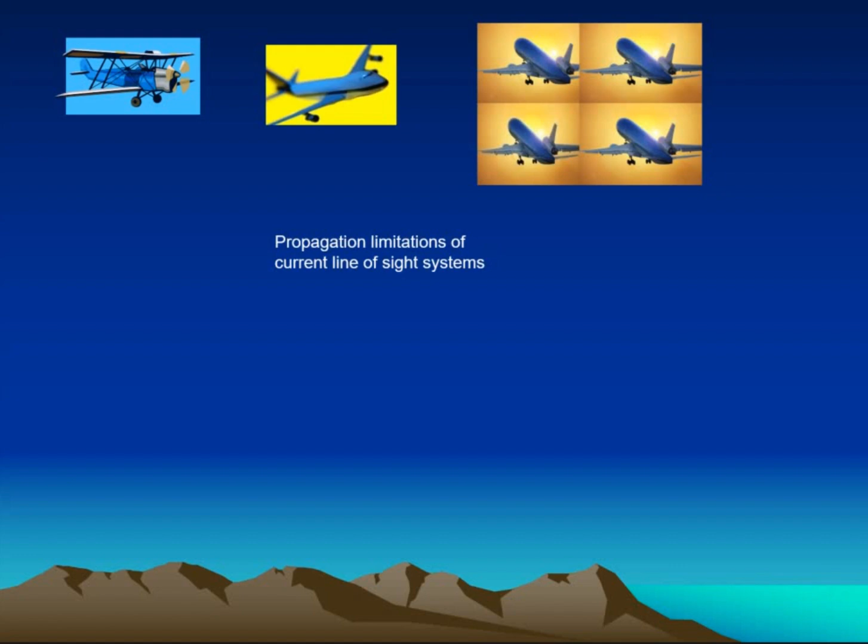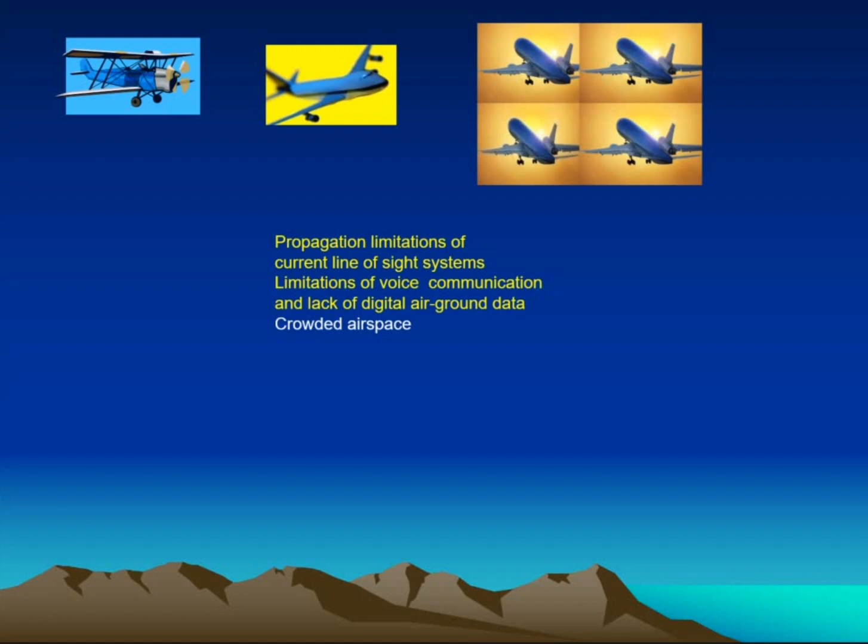But as the industry grew exponentially, so did the challenges, which included propagation limitations of the line-of-sight systems, limitations of voice communication, and a lack of digital air-ground data, a crowded airspace, increased terrorism, runway and ramp capacity.

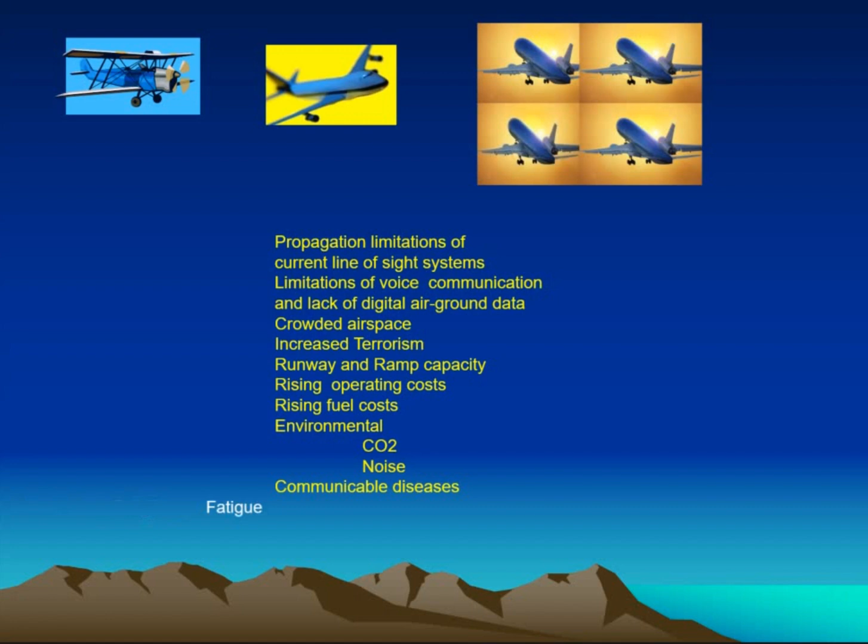A rising operating costs, rising fuel costs, environmental issues, communicable diseases, and of late, COVID-19, fatigue, both by the pilots and controllers, runway safety, and training.

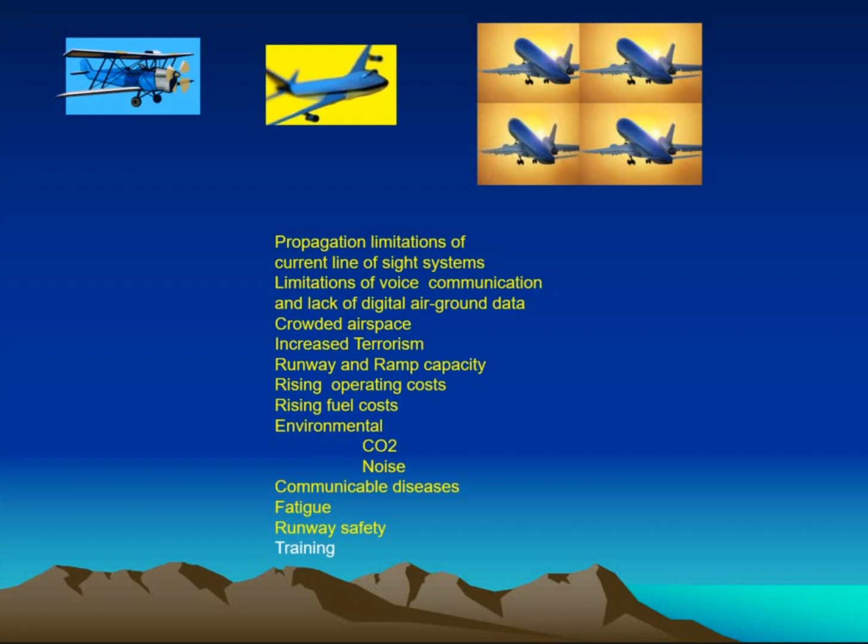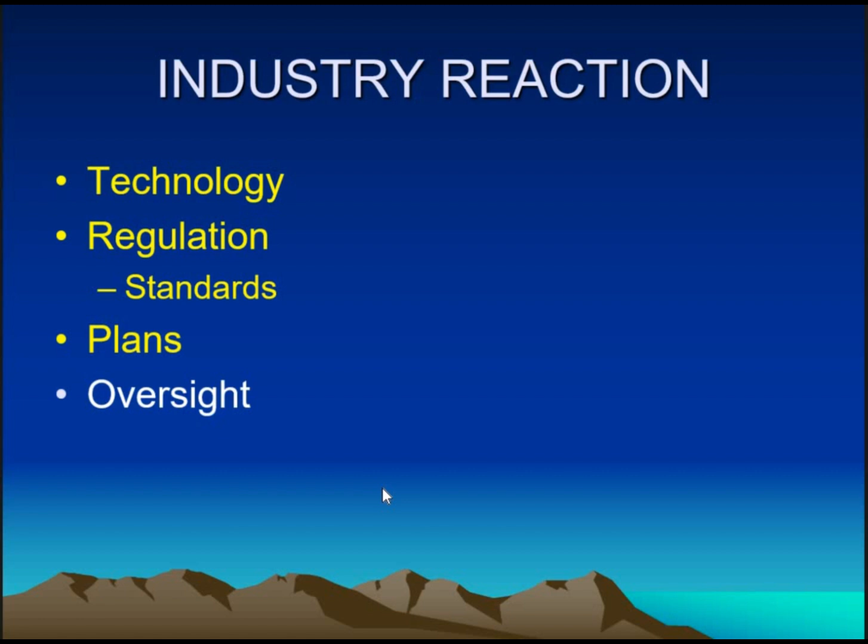So how did the industry respond to these challenges? Number one, it responded with technology. Secondly, it responded with strong regulation, and especially with standards. It responded with plans, and finally, it responded with oversight.

Now, let us explore how the aviation industry has harnessed technology to overcome the challenges posed by its remarkable growth.

In the early 1980s, the International Civil Aviation Organization, ICAO, recognized the increasing limitation of the present air navigation systems and the need for improvements to take civil aviation into the 21st century. And so in 1983, ICAO established the Special Committee on Future Air Navigation Systems, which is also known as FANS 1.

The need for change in the current global air navigation system is due to two principal factors. The first one being the present and growing air traffic demand, with which the current system, by virtue of its limitations, will be unable to cope. And the second, the need for global consistency in the provision of air traffic services during the progression toward a seamless air traffic management system.

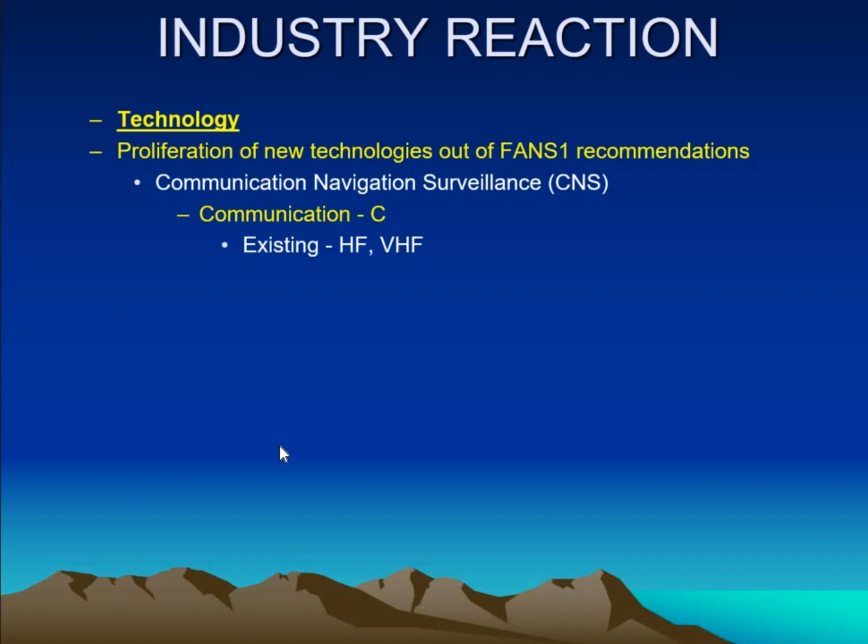Now, in order to address some of these problems, the industry has responded with a technology known as VHF data links. And this technology is classified into about 3 or so modes. You have what you call the VDL Mode 2, VDL Mode 3, and VDL Mode 4.

For example, with one frequency, VDL Mode 3 is able to create up to 4 discrete digital channels. This will make it possible to have both digital voice and data transmitted via the same frequency, hence increasing capacity with tremendous improvement on voice clarity and zero interference. So a controller will be able to communicate with a pilot on voice and at the same time send data on the same frequency. Also, with the 4 channels, up to 4 controllers will be able to communicate with 4 pilots on the same frequency at the same time.

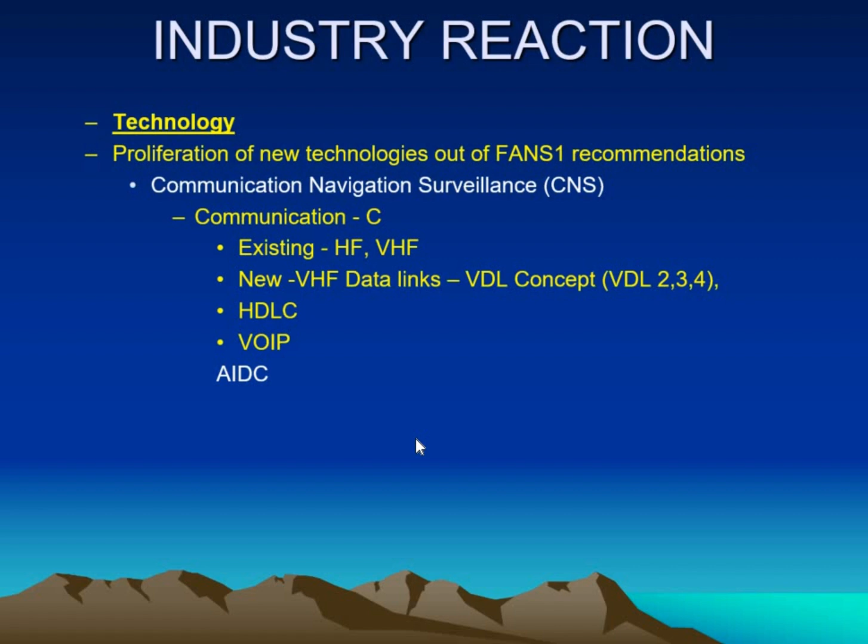The other technology that we want to discuss is the AIDC, Air Traffic Interfacility Data Communication. The AIDC application automatically exchanges air traffic control information between air traffic service units in support of the air traffic control functions relating to notification of flights approaching an FIR, that is Flight Information Region boundary. It is also used for coordinating boundary crossing conditions and transfer of control at the FIR boundary.

Another technology which is becoming increasingly important and finding its way onto the display of the controller is ADS-C, which is Automatic Dependent Surveillance Contract, with an emphasis on CPDLC, which is Controller Pilot Data Link Communication. With CPDLC, the controller is able to communicate with the pilot in oceanic areas and places where otherwise voice communication is a challenge. So it is also increasingly replacing HF in the oceanic. It is an accurate way of communicating and also a safe way of doing so.

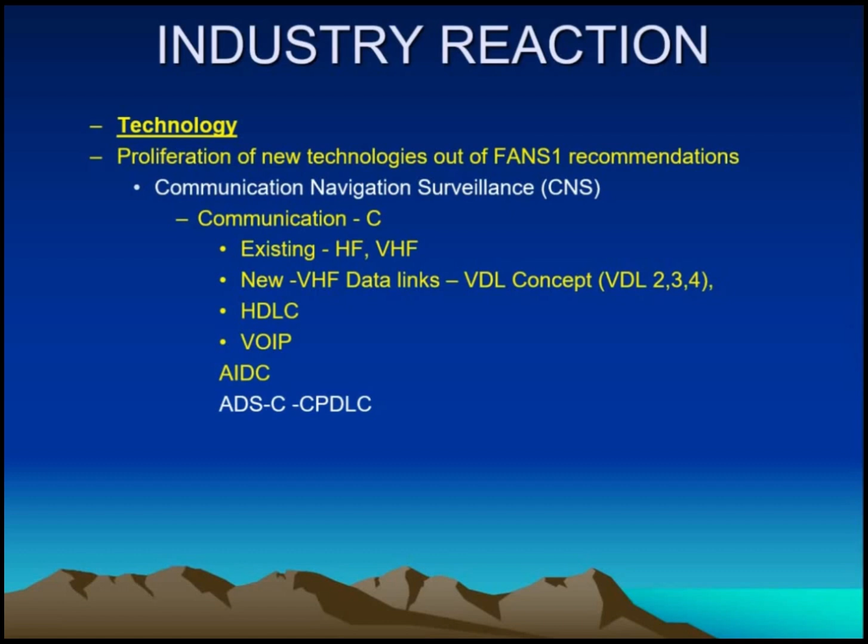And finally, under communication, the industry has seen the traditional or conventional flight information service, that is FIS, being increasingly replaced by the data link flight information service, or DFIS.

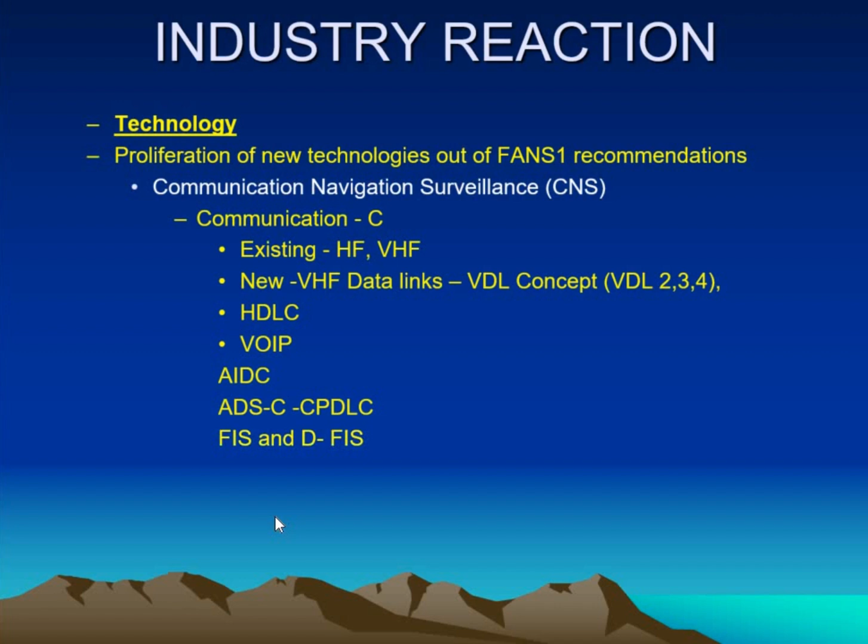So now, let us see how the industry also responded to the traditional or conventional ground-based navigation system. As discussed earlier, the FANS 1 committee had recommended the migration of technology towards a satellite-based system, since ground-based systems like the DVOR, DME, ILS, and even the microwave landing system are affected by propagation limitations like line of sight, signal reflections, and weather. There is also the problem of inability to provide a consistent performance throughout the globe. That is to say, there are states or areas with strong ground facilities while others have absolutely none.

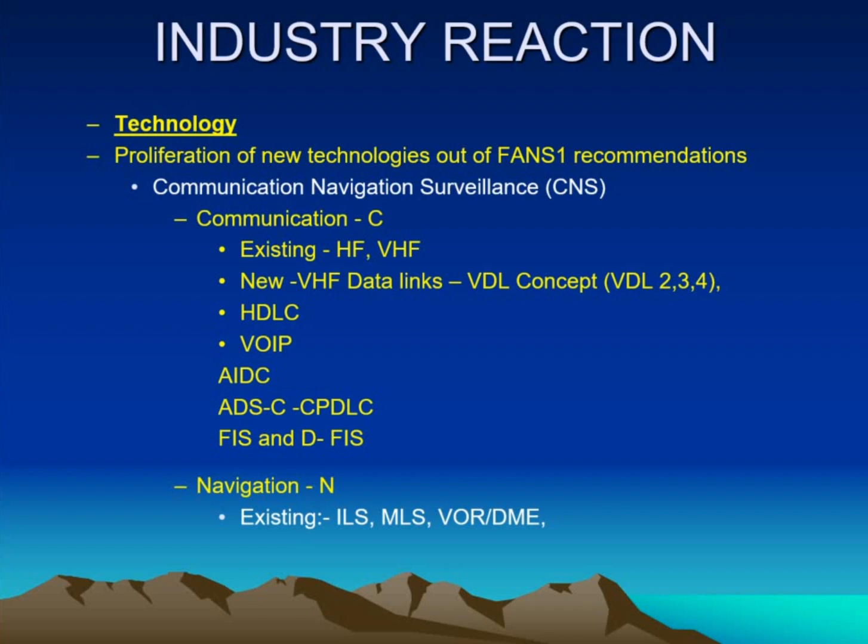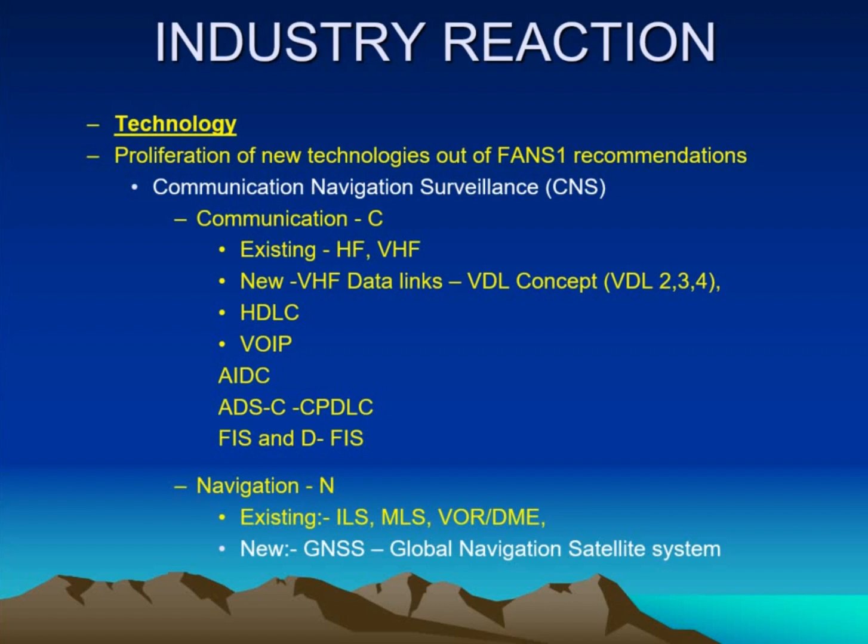So the industry has seen a progressive and aggressive shift in terms of technology from ground-based systems to satellite-based ones. And it has seen the introduction of GNSS, which stands for Global Navigation Satellite System, GBAS, Ground-Based Augmentation System, and SBAS, which stands for Satellite-Based Augmentation System.

What is GNSS, which stands for Global Navigation Satellite System? It is simply a network of satellites broadcasting timing and orbital information, which is used for navigation and positioning measurement. Examples could be like the GPS, which is the Global Positioning System, and which is American, and the signal is free. You could also have the EGNOS, which stands for European Geostationary Navigation Overlay Service, which is European. And we also have the GLONASS, which stands for Global Navigation Satellite System, which is Russian. However, the GPS has been the most preferred system so far.

So the benefit of GNSS in aviation is enabling aircraft to fly direct from departure to destination, using the most fuel-efficient route, or to avoid complicated terrain at low altitude. GNSS has enhanced the design of performance-based navigation, PBN routes and procedures, which are designed to meet a navigation specification defined in terms of accuracy, integrity, availability, continuity, and functionality for the proposed operations in the context of a particular airspace. The industry has seen an increased introduction of GNSS procedures all over the world since the introduction of GNSS.

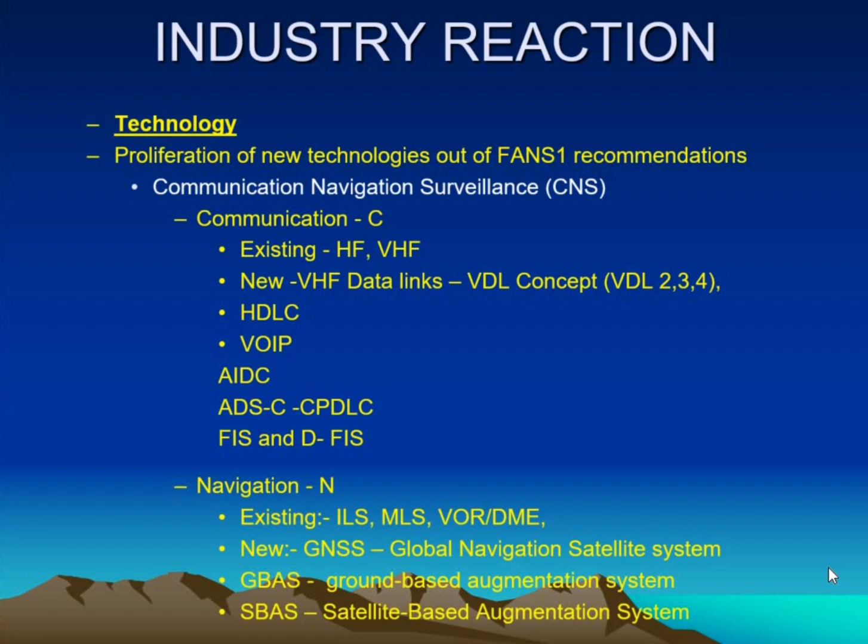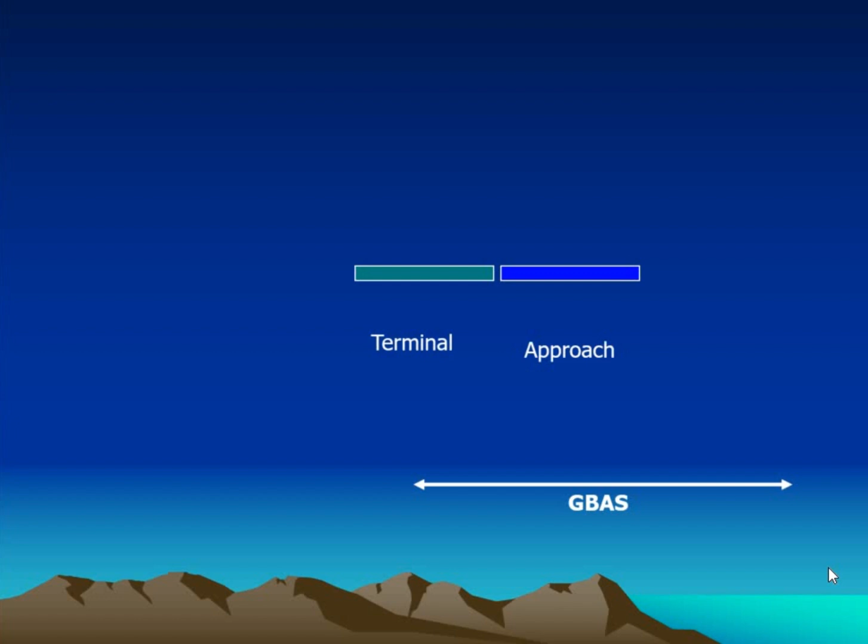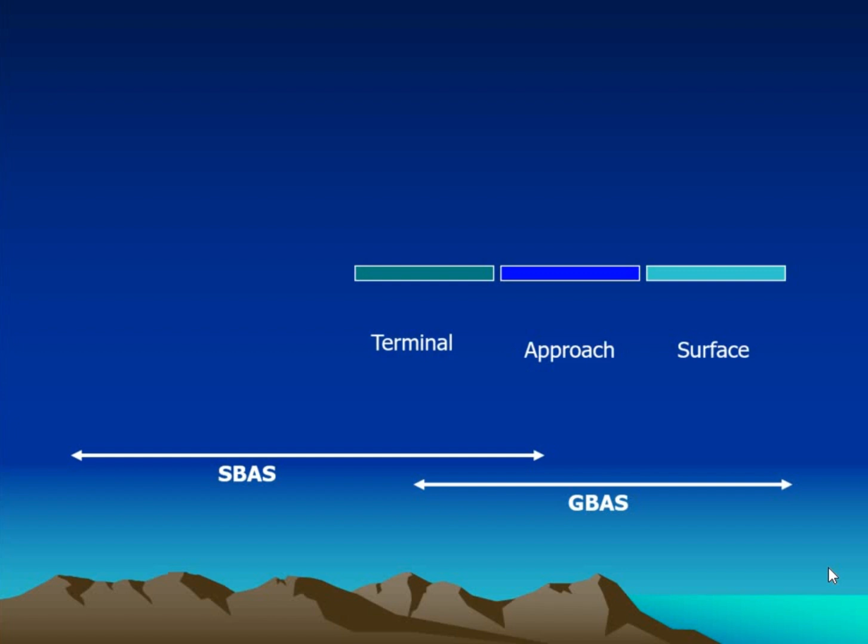So we are saying that for GBAS, it will be able to control the aircraft right from terminal to approach up to the surface, up to the ground, and that's why it can even be used in place of the ILS up to Category 3. And for SBAS, it will be able to control aircraft right from en route, oceanic, and en route domestic.

Now, the last area of improvement, as recommended by the FANS 1 committee, was surveillance. For many years, the conventional way of monitoring aircraft in the en route airspace has been primary radar and SSR in the approach or terminal airspace. Both primary radar and SSR suffer from line of sight propagation problems. This means in order to cover the whole airspace, several radars are required, making it expensive.

So how did the industry respond to this challenge? The industry responded with the introduction of automatic dependent surveillance broadcast. With this technology, there is no need for radar systems, and aircraft can be monitored beyond the line of sight. As a matter of fact, it is possible to control aircraft in large areas of airspace, including oceanic areas, where availability of radar services is not possible or extremely expensive.

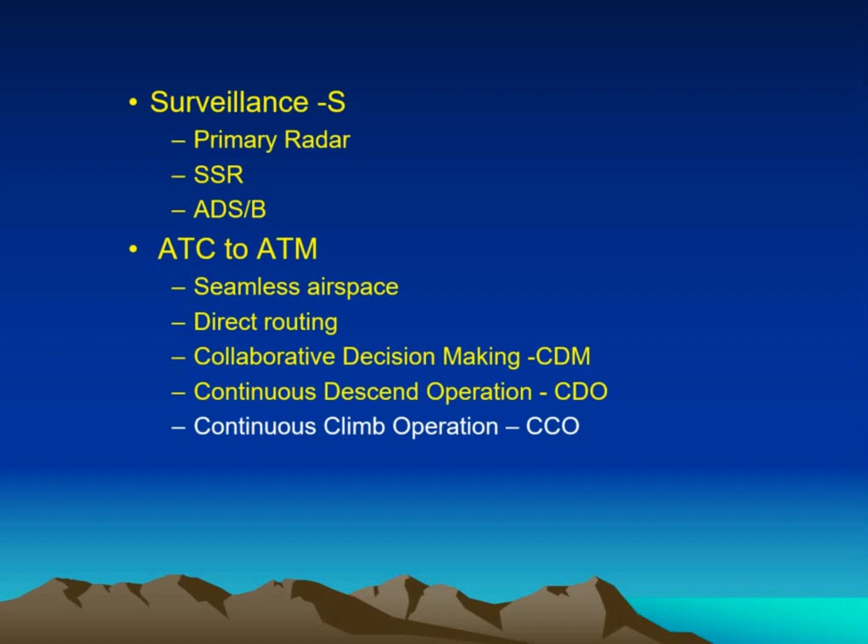The industry has thus seen the introduction of a seamless airspace, direct routing, collaborative decision-making, continuous descent operation or CDO, continuous climb operation CCO, and air traffic flow management.

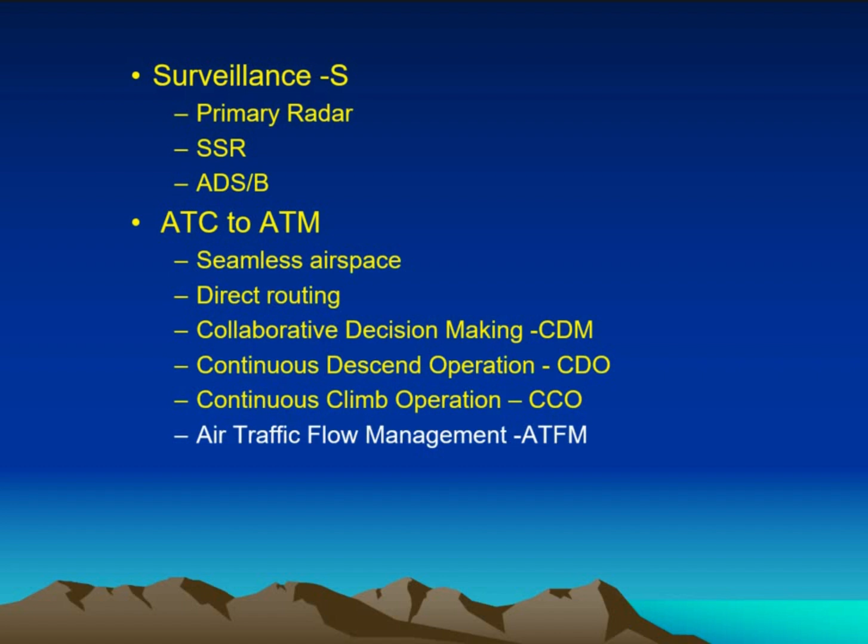The industry has also seen the progressive movement of the conventional aeronautical information service to aeronautical information management, or from a product-based service to digital data exchange.

The industry has seen the introduction of the electronic aeronautical information publication, the introduction of the electronic terrain and obstacle data, and the introduction of the digital NOTAM.

The electronic terrain and obstacle data, ETOD, is the digital representation of terrain and obstacles provided as datasets satisfying user requirements for a series of airborne and ground applications.

Such an application as the enhanced ground proximity warning system uses ETOD to help flight crews avoid controlled flight into terrain by providing information about terrain and obstacles. ETOD is also increasingly being used for procedure design.

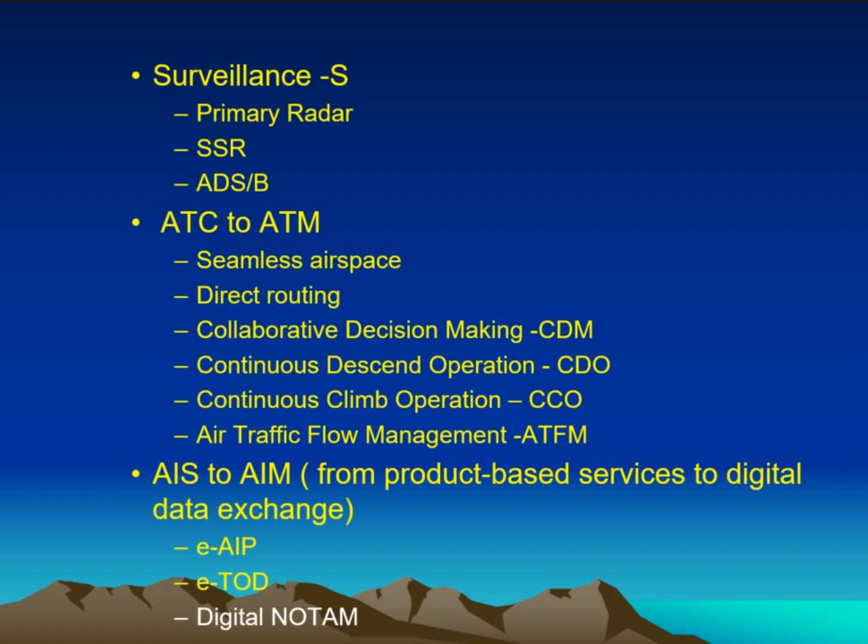As with the digital NOTAM, the digital system will allow pilots to tailor NOTAM searches very specifically to their mission. They no longer have to look through pages of paper to access information. In some states, pilots have to visit the NOTAM office or offices for briefing or NOTAMs. This will not be necessary with digital NOTAMs.

So, we have seen how the industry responded with technology to address the emerging challenges in the aviation industry. But there was still a problem: how do you ensure compliance by the sovereign states in implementing recommended standards?

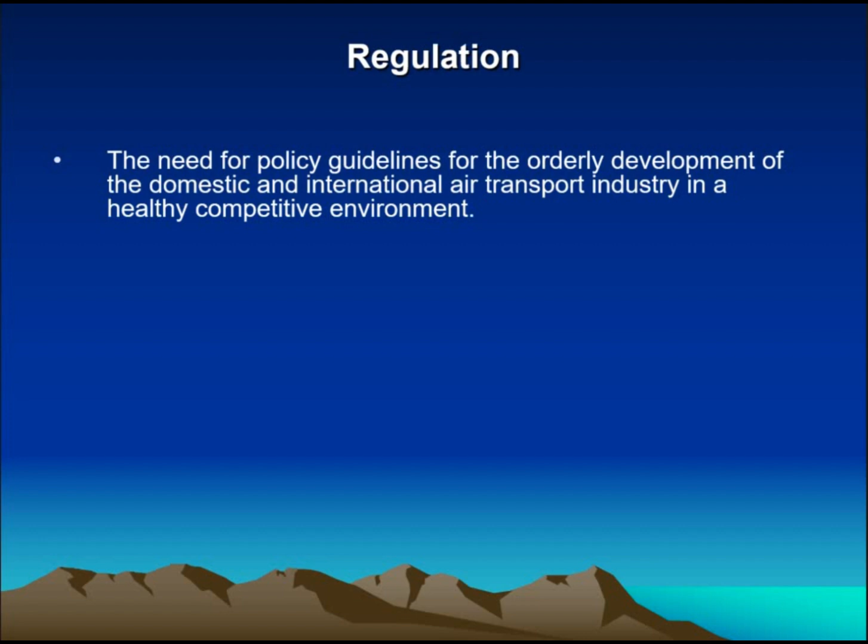This is where regulation comes in. The industry saw the need for policy guidelines for the orderly development of the domestic and international air transport industry in a healthy and competitive environment.

Accordingly, the Civil Aviation Authority of that particular state has the responsibility to prepare a framework of policy for domestic air transport services, keeping in view various parameters, namely ensuring safety, security, and orderly growth of air transport services, and keeping in view the infrastructure constraints at a number of airports.

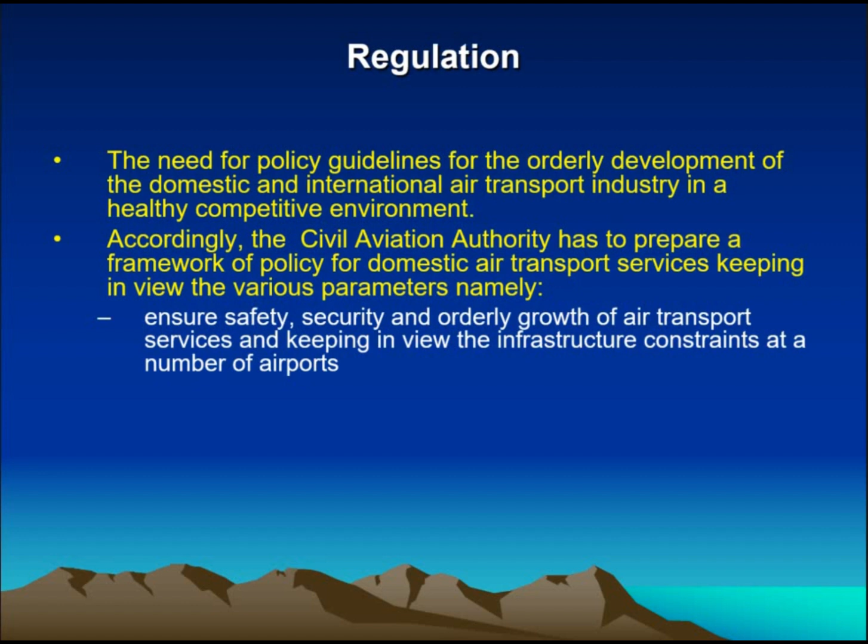And most importantly, domesticate and give force to all ICAO standards, that is SARPs, as contained in the 18, or should we say 19 annexes to the Chicago Convention, that is if we include the safety annex. Now, the annexes cover all technical and operational aspects of international civil aviation.

Standards are specifications, the uniform application of which is necessary for the safety or regularity of international civil aviation. Nonetheless, a recommended practice is one agreed to be desirable but not essential.

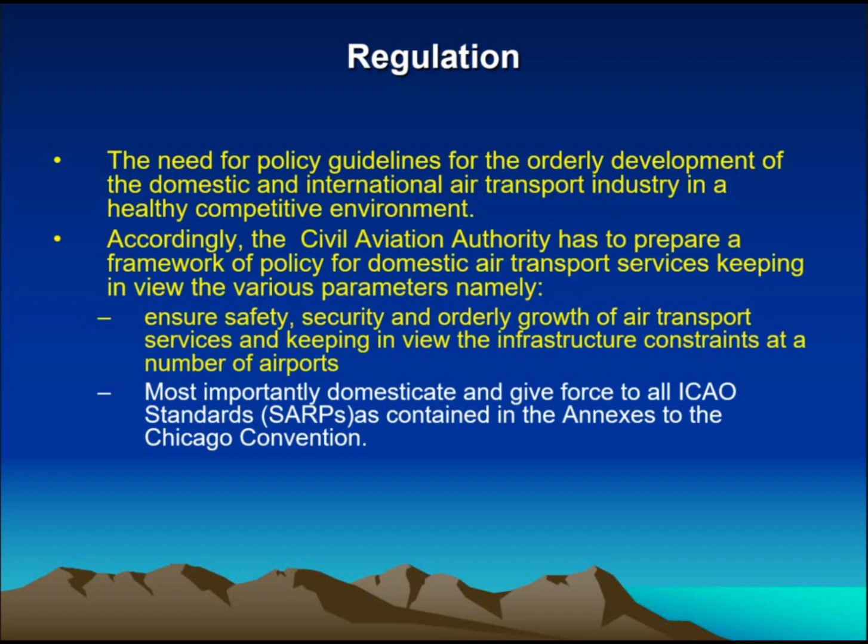Now, having dealt with the issue of regulation, the industry now looked to the issue of quality of service as a means of enhancing safety.

From the airlines, an oversight program known as IOSA, that is IATA Operational Safety Audit, was developed by the International Air Transport Association, IATA. The program is an internationally recognized and accepted evaluation system designed to assess the operation, management, and control systems of an airline. IOSA's quality audit principles are designed to conduct audits in a standardized manner.

This is not a mandatory program for the airlines, but it improves the safety of the airline and reduces accidents. The other oversight programs are by ICAO. The first one is the ICAO Universal Safety Oversight Audit Program, USOAP.

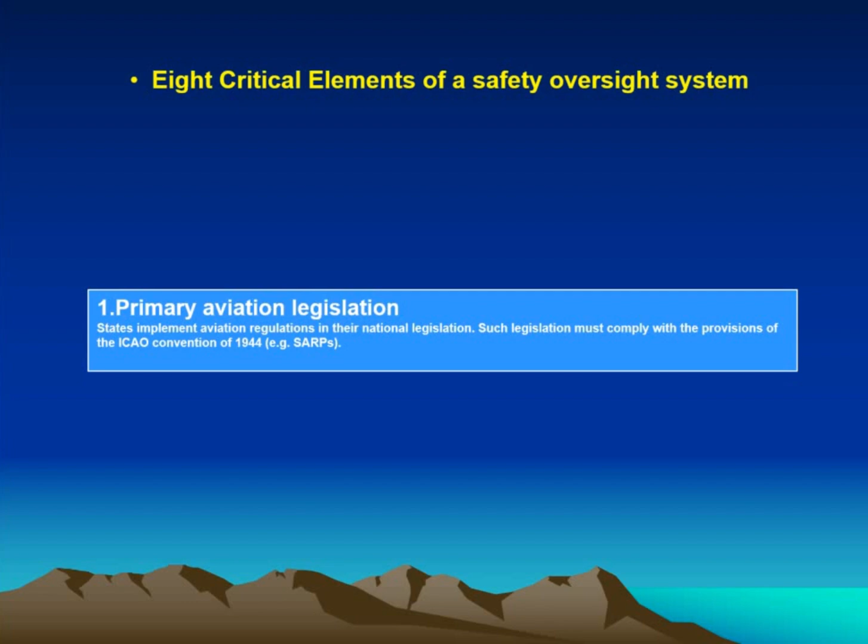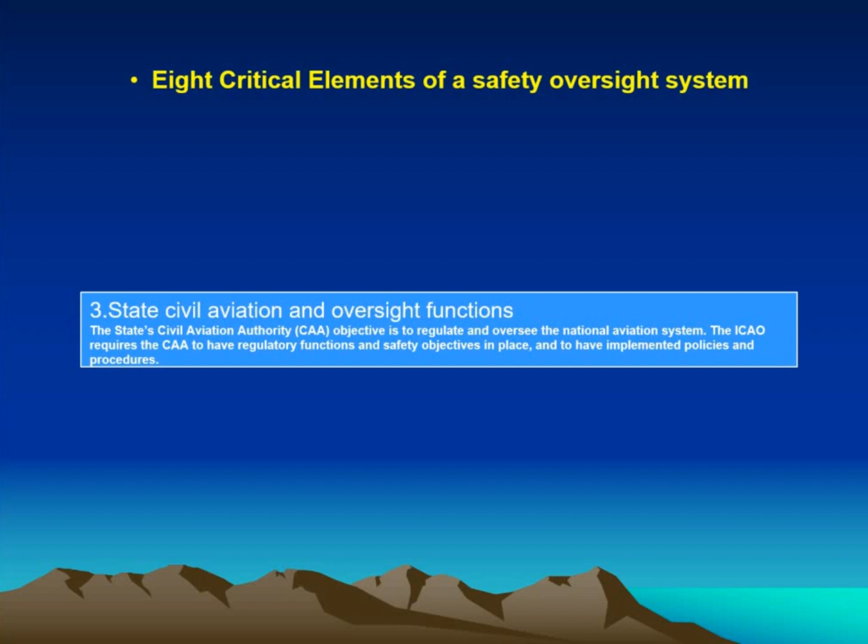The second one is specific operating regulations. The third one is state civil aviation and oversight functions. The fourth one is technical personnel qualification and training.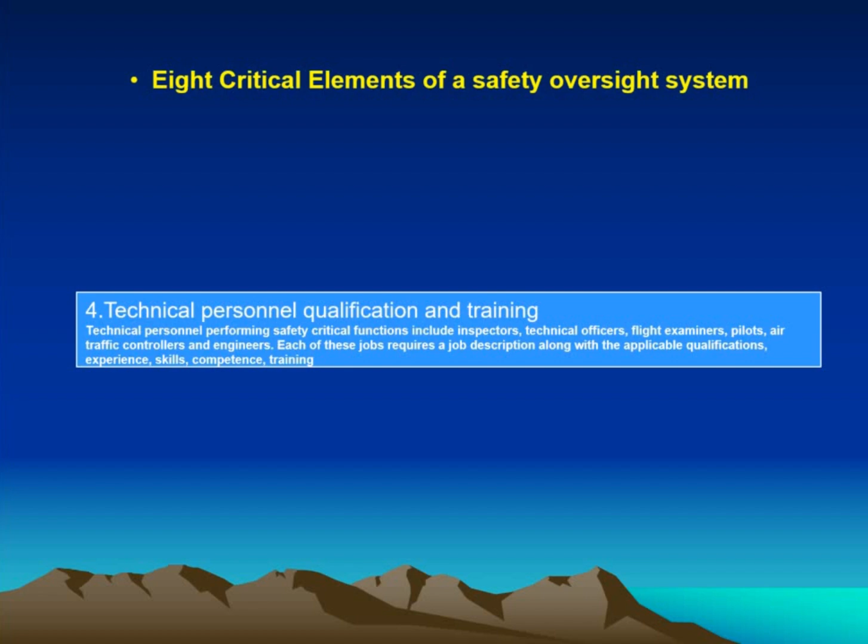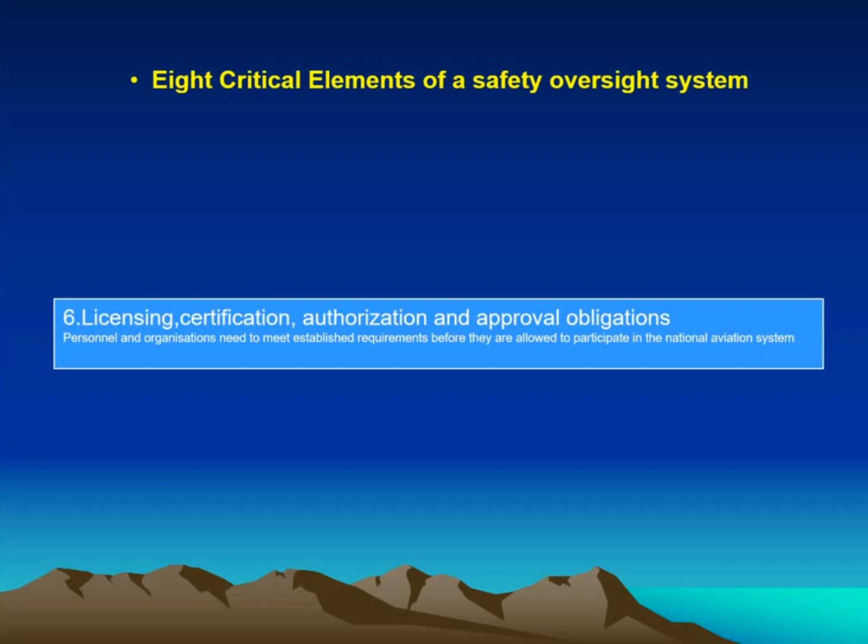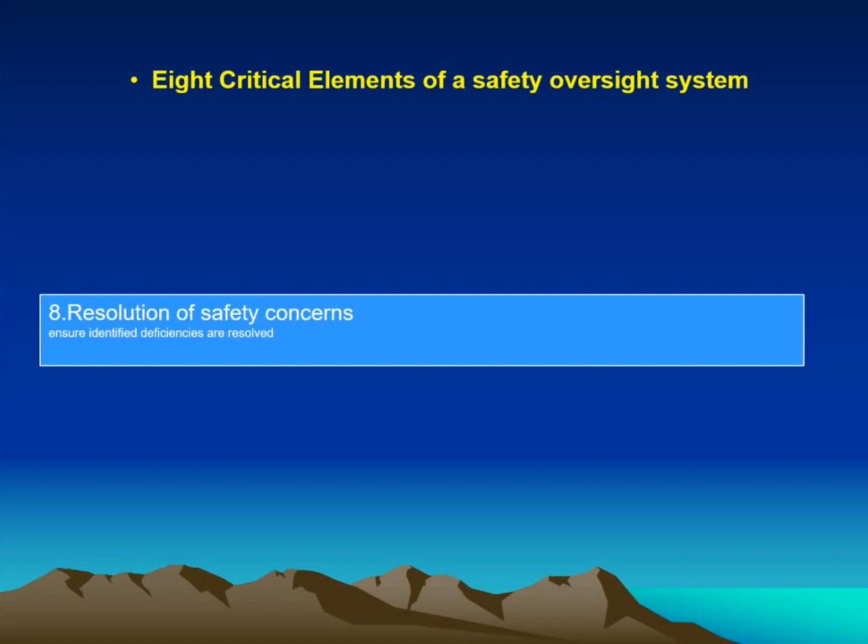The fifth one is technical guidance, tools, and provision of safety critical information. The sixth is licensing, certification, authorization, and approval obligations. The seventh is surveillance obligations. And finally, the eighth is resolution of safety concerns.

The other audit program by ICAO is the Universal Security Audit Program, USAP. Again, just like the first one, it has 8 critical elements. The first is aviation security legislation.

The second one is aviation security programs and regulations. The third is state appropriate authority for aviation security and its responsibilities. The fourth is personnel qualifications and training.

The fifth one is provision of technical guidance, tools, and security critical information. The sixth is certification and approval obligations. The seventh is quality control obligations. And the eighth is resolution of security concerns.

Now, in order to manage this tremendous growth in the aviation industry, the industry came up with plans through ICAO. The first of those plans is the Global Aviation Safety Plan, also known as GASP.

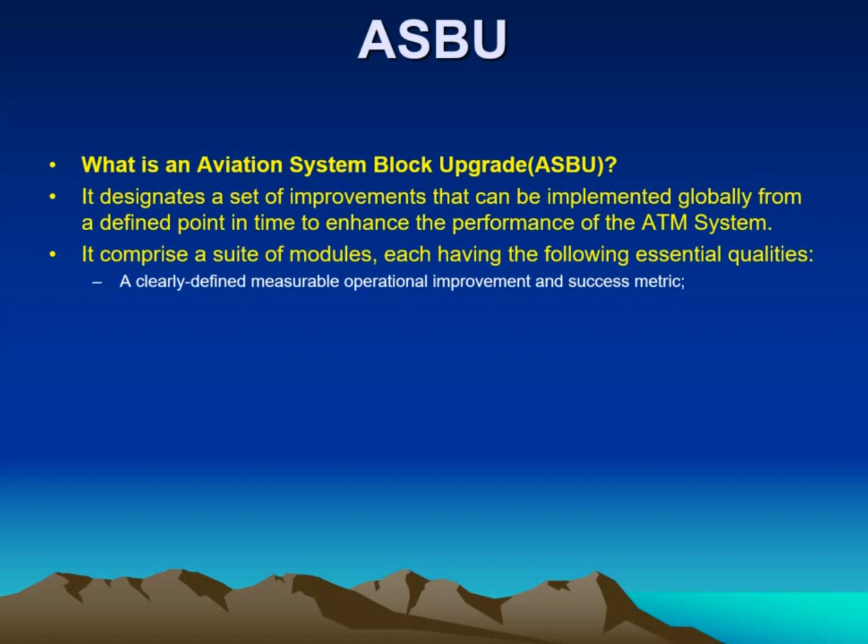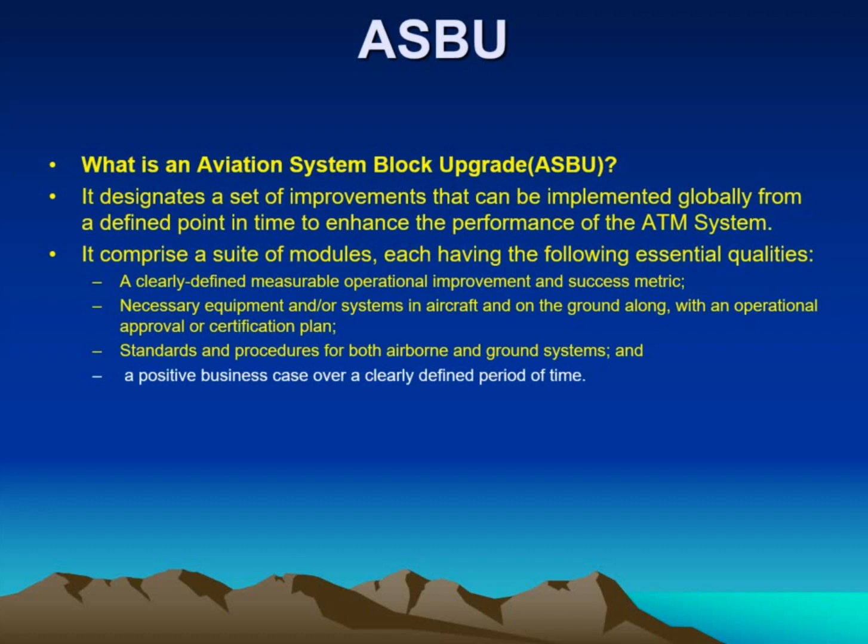It comprises a suite of modules, each having the following essential qualities: a clearly defined, measurable operational improvement and success metric, necessary equipment and/or system in aircraft and on the ground along with an operational approval or certification plan, standards and procedures for both airborne and ground systems, and a positive business case over a clearly defined period of time.

So as an example, let's look at the modules which were supposed to be implemented in Block 0. Block 0 was originally supposed to start being implemented from the year 2013 onward. Block 1 modules were scheduled to start being implemented from 2019 onwards. Block 2 from 2023 onwards, and lastly Block 3 from 2028.

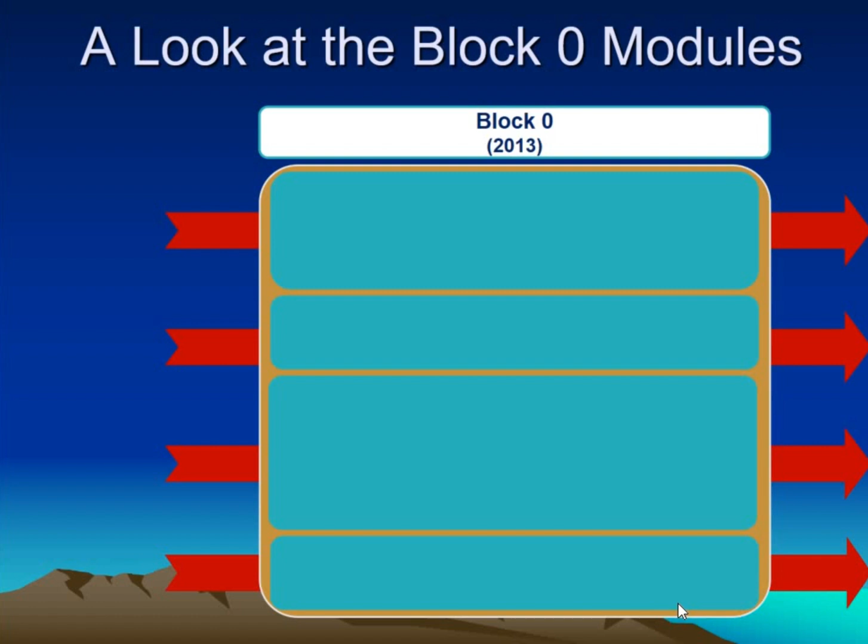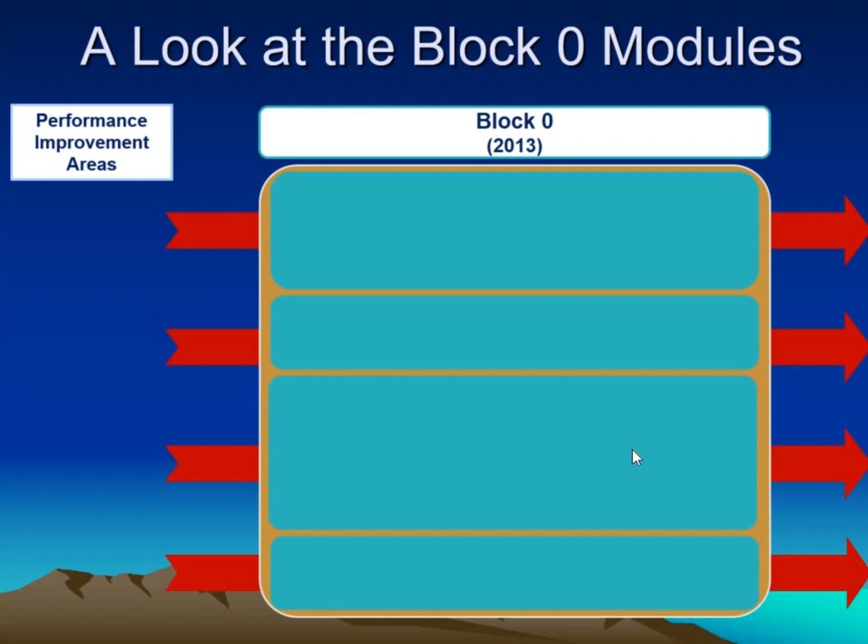The area of improvements in Block 0: the first one was airport operations. In this area of improvement, there were 5 modules to be implemented. The first one was optimization of approach procedures.

The second one was increased runway throughput through wake turbulence separation. The third one was improved traffic flow through runway sequencing. The fourth one was safety and efficiency of surface operations. And the fifth one was improved airport operation through airport collaborative decision making.

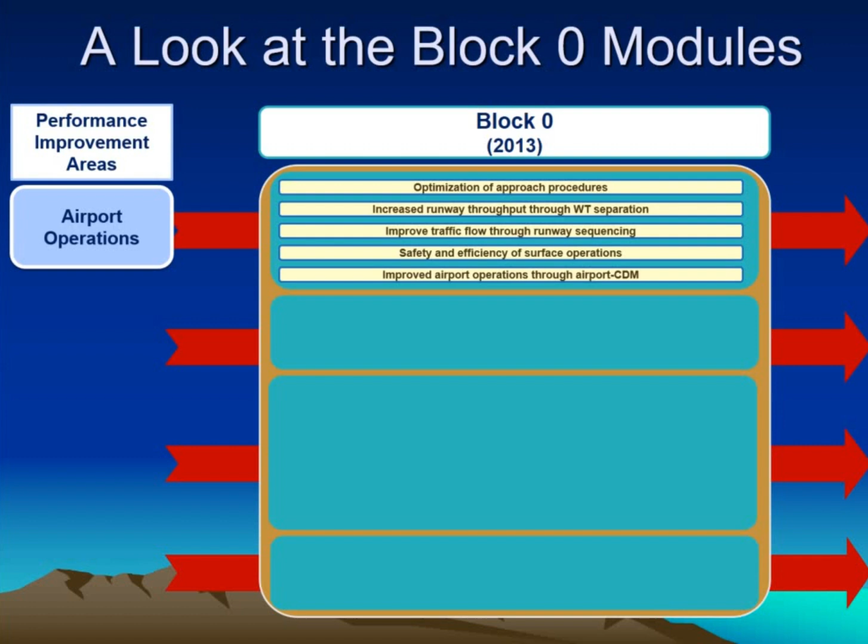The aim of this improvement was to come up with what we call an integrated arrival manager, departure manager, surface manager operation - we call it AMAN, DMAN, or SMAN. This is an integrated sequencing tool that optimizes runway throughput while achieving smooth aircraft traffic flows through the airport under nominal conditions.

The second area of improvement in Block 0 is the globally interoperable systems and data. The modules to be implemented in this performance area: number one is digital aeronautical information management. The second one is increased interoperability, efficiency, and capacity.

While the third one is the meteorological information supporting enhanced operation. So the outcome of this was to provide flight and flow information for a collaborative environment.

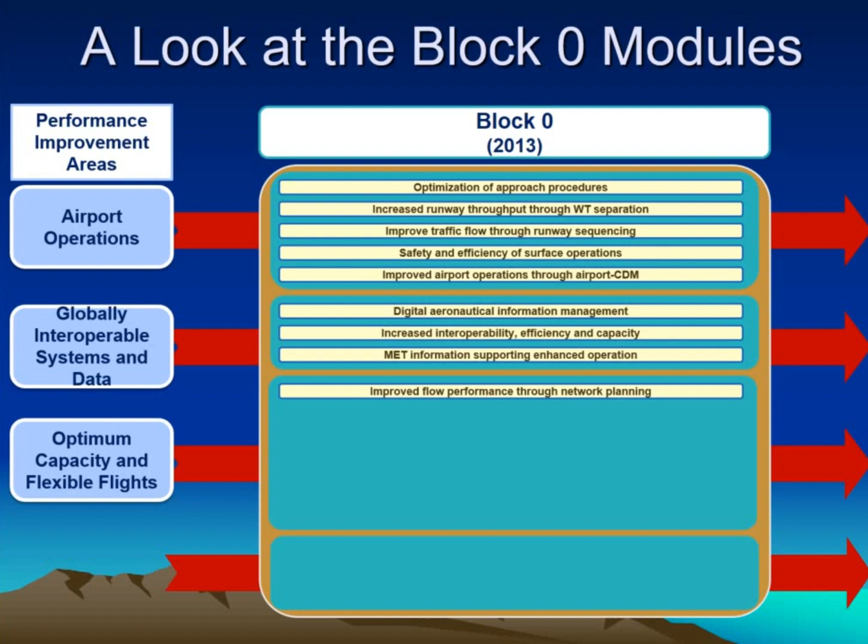The third area of performance improvement in Block 0 was optimum capacity and flexible flights. In this area, 7 modules were to be implemented. The first one, improved flow performance through network planning. Second one, improved operations through enhanced en route trajectories.

The third one, initial capability for ground surveillance. The fourth one, air traffic situational awareness. The fifth one, improved access to optimum flight levels.

The sixth one was the ACAS improvements. And the seventh one was increased effectiveness of ground-based safety nets. So the outcome of this was to be able to manage traffic complexity management.

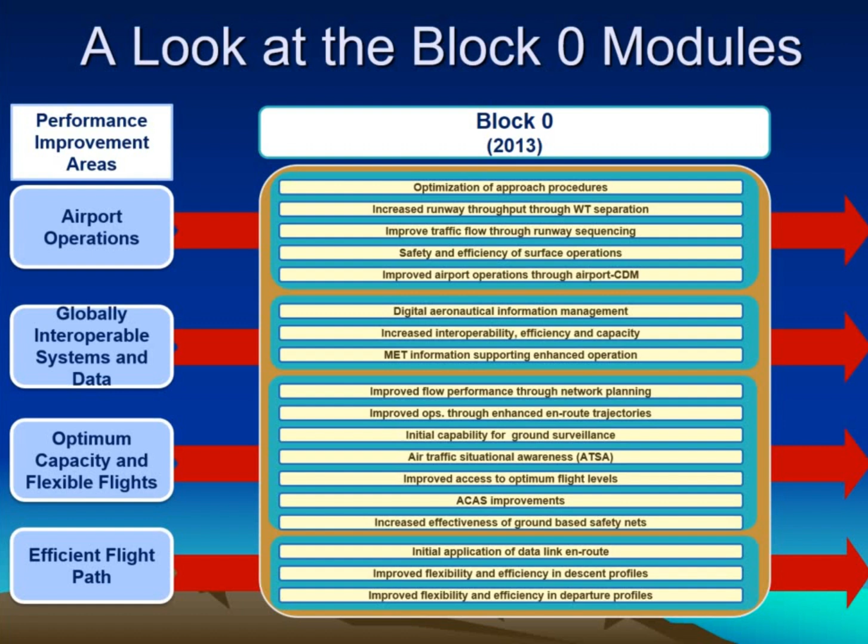The final area of performance improvement in Block 0 was the efficient flight path, which had 3 modules. The first one, initial application of data link en route. The second one, improved flexibility and efficiency in descent profile. And the last one, improved flexibility and efficiency in departure profiles. The output of this was to achieve a full 4D, or four-dimensional trajectory - that is 3D plus time.

Now, to summarize what we have just said, the performance improvement areas in the first area of airport operations will mainly depend on GNSS-based approaches, better wake vortex minima, advanced surface movement guidance and control system, airport collaboration decision-making, and improved metering.

And the globally interoperable system and data modules, the three modules that we have just discussed, will mainly depend on ground-to-ground integration based on AIDC, which we saw earlier, digital AIM, and other developments.

And in the area of optimum capacity and flexible flights, the 7 modules will basically depend on performance-based navigation (PBN), flexible use of airspace (FUA), and CDM, collaborative decision-making, in combination with improved flow planning and air traffic situational awareness.

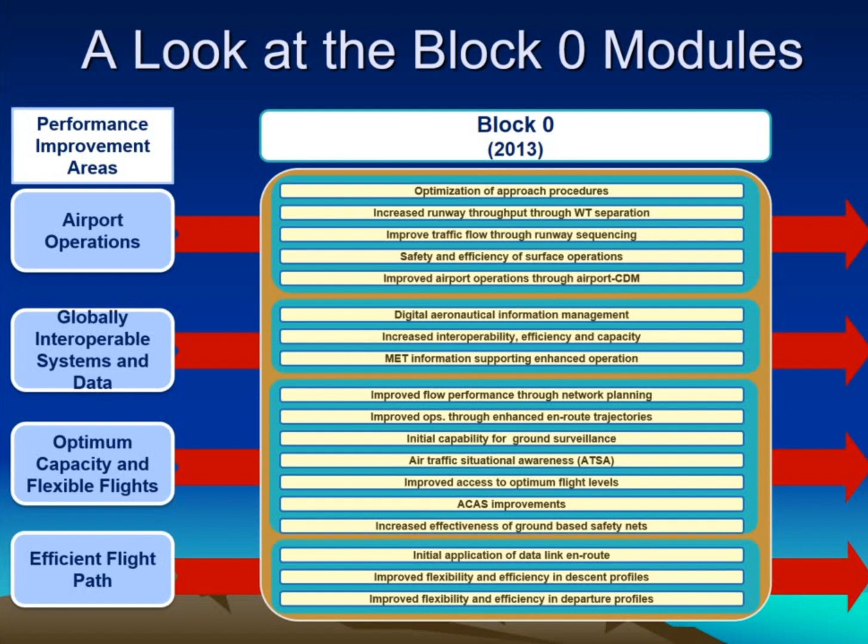And finally, in the area of efficient flight path, the modules will be based on the existing data link operations which support continuous descent operations, continuous climb operations, and en route operations.

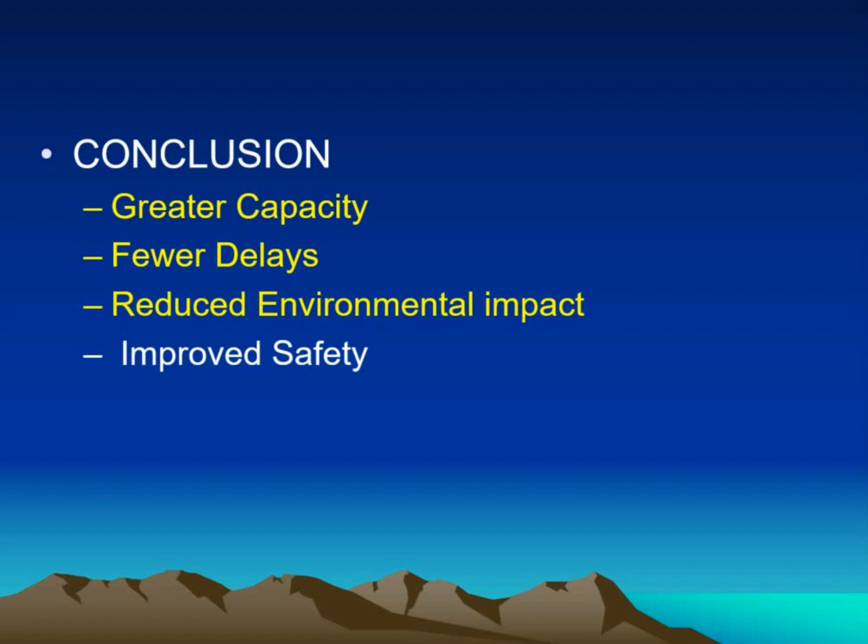In conclusion, the response by the industry in responding to the emerging challenges cited in this lecture have resulted in greater capacity for the industry, fewer delays, reduced environmental impact, improved safety, improved security, and the cost effectiveness of operations across the industry.

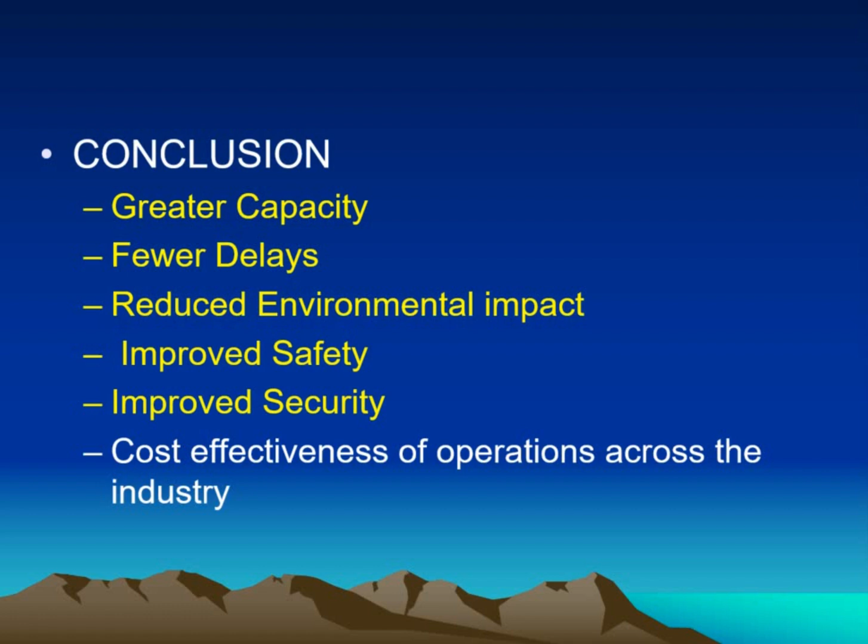Thank you for staying with me until the end of this lecture. I hope you now have some basic understanding on how the industry continues to address the challenges that arise with the expansion of the aviation industry.